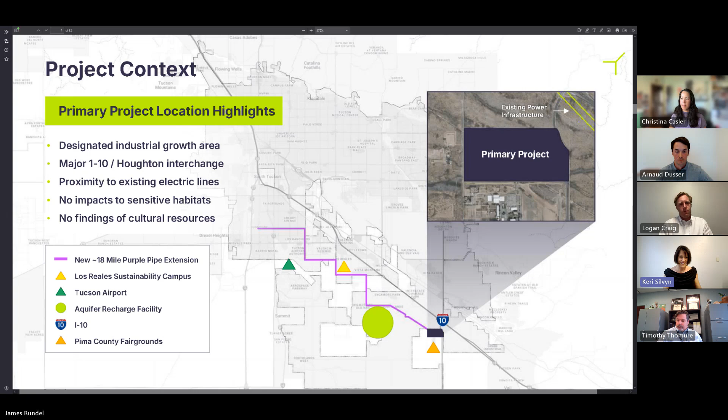We can go to the next slide. And I'm going to speak very quickly about the commitment that Beal is making to water.

I think Tucson Water is going to talk a little bit more about this. Project Blue will be net water positive. We're setting a new standard for industrial users coming into our region to support the city's longstanding water conservation and water stewardship. We will replenish over 100% of consumptive use, both while we are using potable water for the 2 years that we will be building the reclaimed water line for the first phase, as well as once we're using the reclaimed water. We're going to be investing in programs that truly create and tap into new water. Again, Tucson Water will explain that in a little more detail.

Just want to note, the reclaimed water line will take 2 years to construct. The consumptive loss replenishment requirement in the development agreement is for both potable and the ongoing reclaimed water use. The infrastructure investment, which is the second pillar under the water positivity, is that 18-mile reclaimed water line and the 30-acre aquifer recharge area being designed, constructed, and oversized by Beal Infrastructure, providing that opportunity at no cost to the city and the taxpayers. This brings that reclaimed water opportunity into this southeastern area of the region.

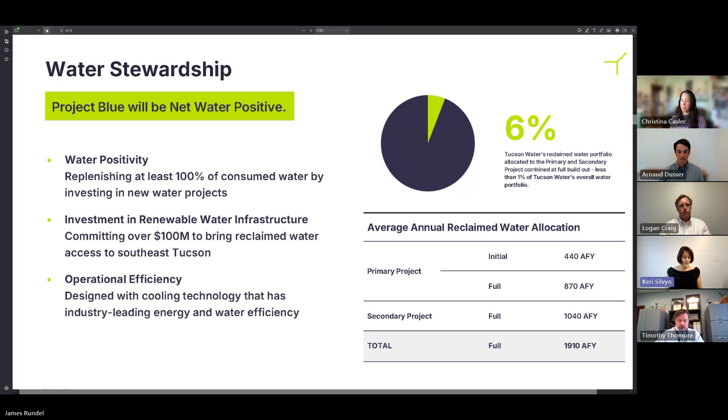Go ahead, next slide. This next slide provides a little bit of context.

Actually, we don't have that slide, so I'll just move on to power and clean energy.

Project Blue is committed to prioritizing clean energy generation sources. Project Blue will be a customer of TEP, subject to the energy mix that TEP has and will be creating in the future, aligned with goals towards renewable energy generation. Project Blue will support and not impact TEP's net zero emissions by 2050 goal, and it will also not impact TEP's retirement of all coal assets by 2032.

In the initial phase, which is a little less than half of the initial project, the power required for that phase is excess capacity in the current energy mix plus 900 megawatts of renewable resources identified in TEP's most recent all-resource RFPs, which are 100% renewable. The initial phase also includes Project Blue funded infrastructure improvements that will be oversized for the system.

Project Blue is working with TEP, the system, and the city on the feasibility of installing solar panels over the parking areas. We can't put those on the roofs because of the equipment needed there. For future phases, Project Blue supports TEP's 2050 net zero emissions plan going forward, and the generation for future phases will be sourced through new RFPs as required by state law.

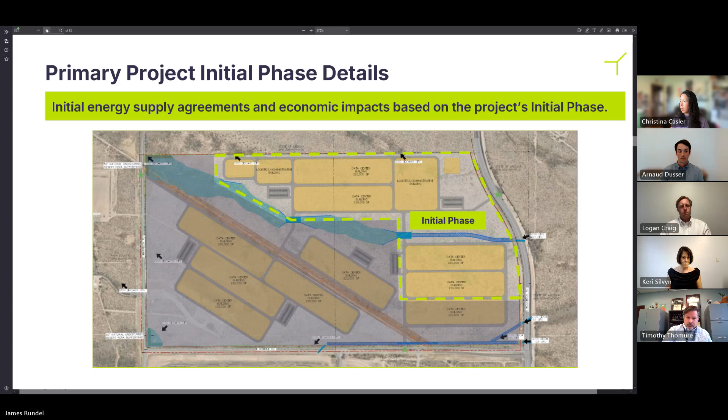The tax revenue generated into the entire public system for that initial phase - city, county, and state - is $250 million over 10 years. $97 million is what's coming to the city of Tucson's general fund, which supports anything the city of Tucson uses its general fund for. This project will also support school districts.

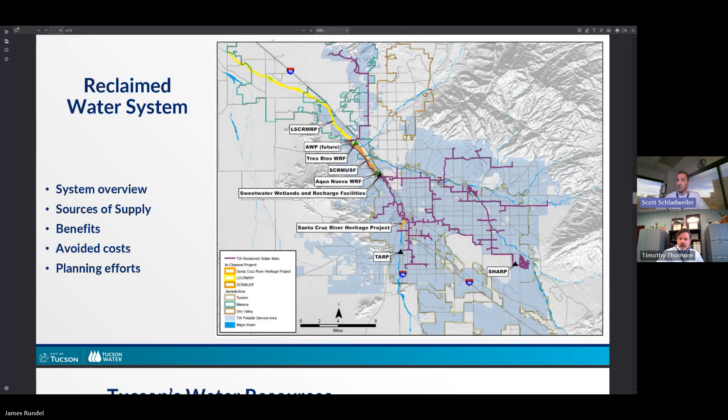All right, let's take a snapshot and look at our total resource portfolio. First off, let's start with Colorado River water. We have the largest allocation in the state of municipal and industrial Colorado River water, over 144,191 acre feet a year. Our average demand is right around 100,000 acre feet a year.

So for decades since we've been taking this, what we don't use we've been putting in the ground and storing, and we call that banking. We've been putting that water in the ground where we can use it for future use. Right now we have almost 6 years of just Colorado River water stored in the ground.

We're doing the same thing with reclaimed water. What we don't use and what isn't delivered to customers to meet demand goes into the ground where we're storing that water. We get long-term storage credits for that, and that helps build our resource portfolio up.

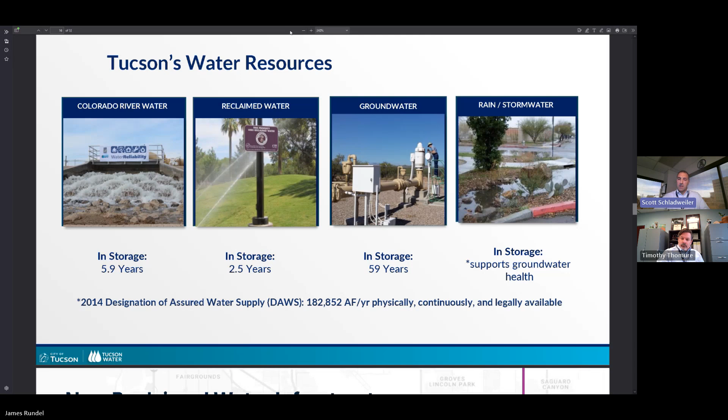I know there's a lot of concern with groundwater. Groundwater is a finite resource, but there's a lot of groundwater available in Tucson. We actually have millions and millions of acre feet in the ground that are physically and legally available for us to access, to continue supplying our customers and meeting demand. There are right around 60 years of water in the aquifer right now as we speak.

One of the other sources of water we're really starting to focus on, and have done quite a bit with over the last couple of years, is rainwater in the form of rainwater harvesting, but also stormwater, capturing that water to offset groundwater use and support other environmental projects such as our Storm to Shade program and our Million Trees program, where we can install other vegetation around town that'll help with the heat island effect. These are really hard to quantify in some ways, but they do offset groundwater use and have a very positive effect on our environment around town, as well as the quality of life.

One of the questions we always get, and it came up even at the last meeting, is how much water do we actually have? As a municipal provider, we are required to have what's called a designation of assured water supply. This is required by the Department of Water Resources, which was established as part of that 1980 Groundwater Management Act I mentioned. This is a very important document - it protects both customers and the environment.

It's actually a very lengthy process. What we have to do is provide all of our resources, all of our current demands. We have to show our committed demands, which is all of our platted lots - those lots we've committed to serving but have not yet installed meters on or have not been built on. We also include projected water use and projected growth throughout our system. We have to show that we can provide water to all of our customers and projected customers for a period of 100 years.

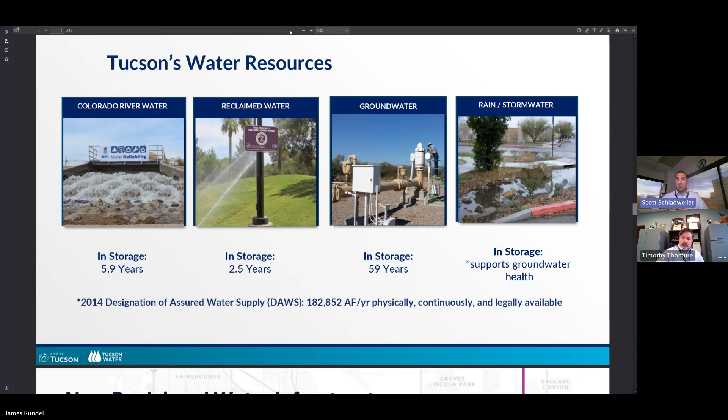I can't tell you what the final numbers will be on the new one, but those will be out and public very soon, even made public for review. That number is not going down; it's actually going up quite a bit. So our capacity to provide for the community is steadily increasing, thanks to the community. We have a very water smart community, conscious of where we live and how important water is. But there were also very important decisions made by mayors and council, past and present, that set the stage for our water sustainability and future.

As mentioned, water demands on the reclaim system during winter months are very low, so during those months we'll be pushing water to the recharge facilities. We need places to store this, and this facility will add capacity for the Tucson system to store additional water. During peak months, we'll recover water from this facility to meet demands for Project Blue and any other future customers in that area. One major advantage is that with storage here, recovery during peak months will have much smaller impact on the rest of the system, all the way back to our reclaim plant.

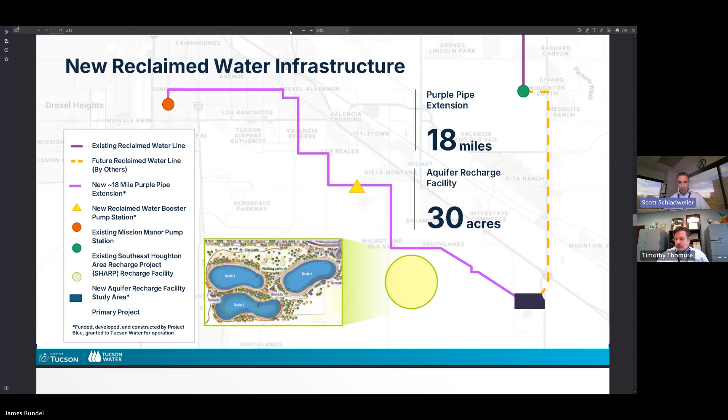Next slide. Let's switch gears and talk about water positivity. I know there are a lot of questions about what this means. Project Blue will be required to replenish at least 100% of their consumptive use—this is all potable and reclaimed water supplied to the primary or secondary site. What that means is we need to replace that water with something measurable and quantifiable that shows an increase in water quantity, water quality, or access to water that wasn't available before.

This is going to be done in a couple of different ways. Starting on day one, as soon as meters are set, Project Blue will pay all the same standard fees and rates that every other user will pay. Whether that's for potable, they'll pay their commercial rates. When they're on reclaim, they'll pay the reclaim rates. They'll pay the same monthly fees as any other customer.

But in addition, they will pay what's called a water positivity or water replenishment rate. This is a rate paid to Tucson Water so we can implement water positivity projects that will offset the use of this water.

There's another method they can use as well, and that is they can implement a project on their own to offset that use. We'll talk about some of those projects in a couple seconds. That might mean constructing facilities, or it might mean implementing programs that help with conservation.

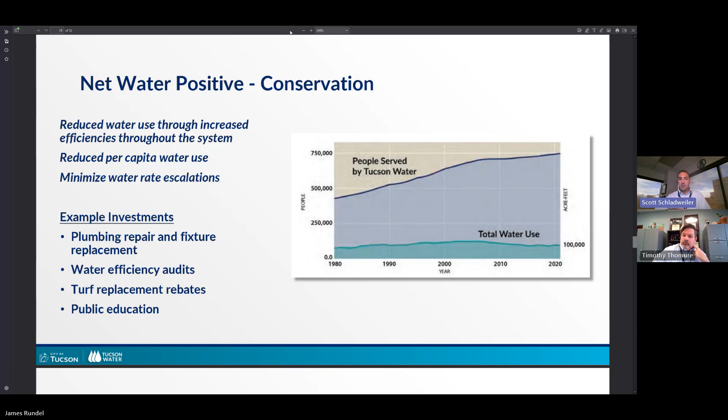System efficiency. Every water system in the world leaks at some point, right? We have leaks throughout our system. There are water losses that we need to address that impact our ability to provide water. For example, we pump a certain amount of water, and what we end up billing is always quite a bit less, maybe 8 to 10%.

Some of that water, we know where it goes—we test hydrants and flush for water quality reasons. But there are always other ways we can capture some of that lost water, for example through leak detection efforts. Advanced metering infrastructure is something we're about to start implementing. This is an opportunity that has shown real savings throughout the country and other places. We're going to be starting it in our program within the next year or so, within the next several months, deploying advanced metering infrastructure meters.

This program has, in other locations, shown savings within the range of 6 to 12%, and that's with full participation. We might see something a little less than that, but when we compare that to our demand, that is actually a real savings. So even if we did 3%, that's up to 3,000 acre feet a year when we look at our total demand.

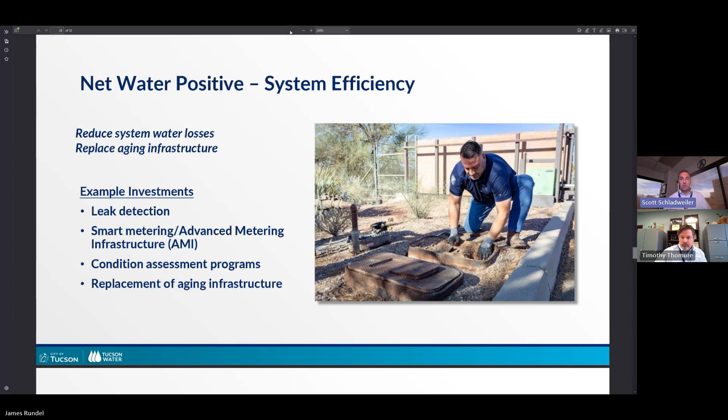Supply augmentation: this is the acquisition of additional water supplies. We can look at importation of water from other locations, that could be desalinated water from another source, even outside of Tucson. There are folks with Central Arizona Project leases elsewhere in the state that may not be utilizing their full lease, may not have a need for it, and may be willing to sell it, or some who don't physically have access to the Colorado River water, and that water could be delivered to Tucson. There's also the opportunity to purchase long-term storage credits.

There was a press release yesterday that showed Tucson Water just purchased 21,000 acre feet of long-term storage credits right here in Tucson. The Bureau has long been storing their portion of effluent in the Santa Cruz River, and just recently they auctioned off about 30,000 acre feet of water, and Tucson bid on that. We were very successful, and we're actually in the process of transferring 21,000 acre feet to our water portfolio right now.

This is something that could be transferred and utilized for economic development. So there are a number of opportunities with supply augmentation. Next slide.

Supply restoration is another big one. Tucson has been heavily impacted by PFAS. We've lost over 30 wells, turned them off as a result of PFAS contamination, not by our doing, but by others. We've been very protective of our water quality, and this has resulted in almost 28 million gallons a day of capacity and redundancy that we've lost within our system.

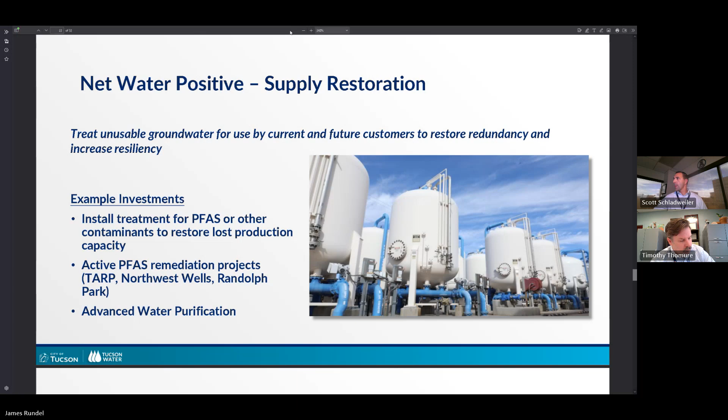And then finally, we have nature-based solutions. Things like our Storm to Shade program, a green stormwater infrastructure program that we charge fees for. This has been a fantastic program, we've received accolades nationwide. What this does is we use stormwater to offset the use of groundwater to plant vegetation around Tucson through curb inlets and chicanes. It's been an amazing program.

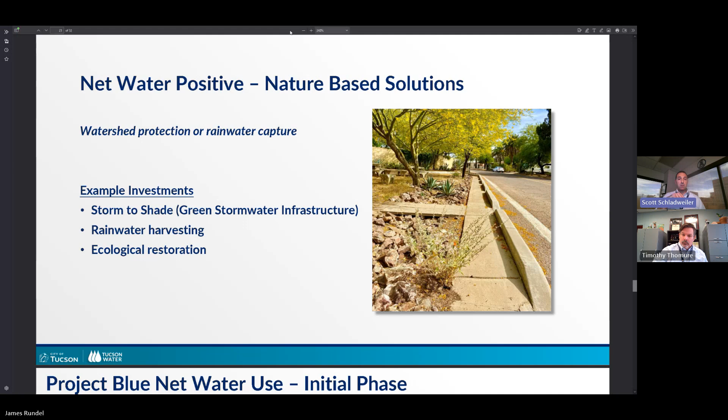Rainwater harvesting also has offsets and the ability to collect water and offset the use of water around town. Ecological restoration is another big one — there's tons of opportunities within the river, around town, collaborating with other agencies to use stormwater, to put water back in the ground and make that water available for us to use. So nature-based solutions is a big one. Next slide.

And then finally, this is a comparison of how Project Blue might compare to golf courses or an equivalent number of houses when we look at overall water positivity. If we take the initial use of water out of Project Blue, which is about 440 acre feet a year, at the water positivity rate of $750 an acre foot, they would be contributing over $330,000 a year. That money would go towards any number of projects we were just talking about to help offset their water use. So at the end of the day, the net water used by Project Blue would be zero, because those water positivity projects would contribute back to our resource portfolio.

When compared to a golf course, for example, the average golf course uses somewhere between 400 and 500 acre feet a year. There is no investment, that water is delivered to the golf course just strictly for irrigation, there's no conservation efforts out there, so there's nothing conserved. When compared to single family homes, 1 acre foot of water typically serves somewhere between 3 and 4 single family homes per year. So if we used four single family homes here, that's about 1,760 homes.

Through conservation fees and our GSI fees, we collect about $57,500 a year. At the rate of about $750 an acre foot, that means we'd be able to offset about 77 acre feet per year. So what that means is the net water use for 1,760 homes would be reduced to about 363 acre feet a year.

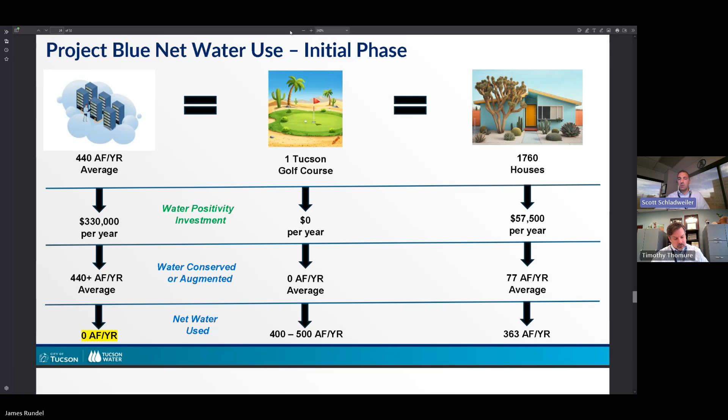So that's just a general comparison of how all of these equate. But what we want to focus on and reiterate is that everything that Project Blue does will be water positive.

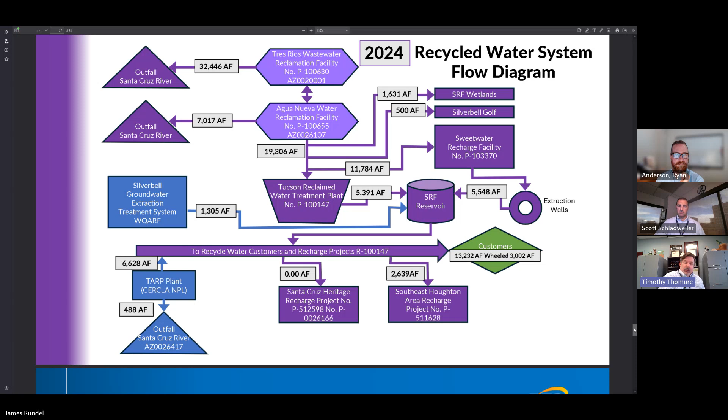Next slide, please. All right, we still got one big segment of presentation with questions around it. So this is energy. And as I turn it to you, Ryan, I'm going to also seed a question to you that came in through the chat tonight.

So a question that's coming up a lot is, we've talked a lot about the water supply in Tucson and the reclaim system. And the question that comes up repeatedly is, but what about the water needs outside of Tucson for the increased energy demand? It's a very fair question, comes up all the time, and I just want to seed that to you as you go into your presentation.

Okay, thank you. Can you hear me all right, Tim? You're good. Okay, good. I just wanted to introduce myself briefly. I'm Ryan Anderson. I manage our business development department here at TEP. Worked at TEP for about 8 years.

And the reason I'm speaking tonight is because my department supports our existing customers, largely our commercial and industrial ones, your school districts, hospitals, the city, the county, the airport, our military installations, the mines. And we also support economic development, which up until about a year and a half ago was pretty sleepy. But my department supports that engagement and runs these prospective customers through the process. So that's why I'm speaking tonight.

We're here to support a data-driven discussion and transparency. I want to talk about the diligence a utility does as we carry out our mission to steward the grid for all customers. And I do have to ask for a little compassion. I get nervous talking to big groups of people, but please do fact check me if I get anything wrong unintentionally.

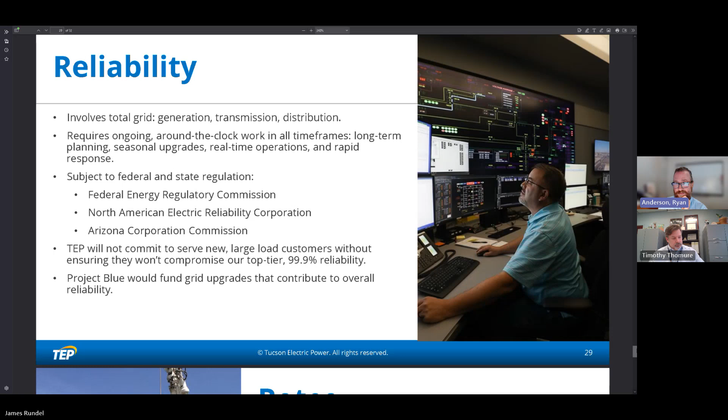Rates. So I touched on this at our last public meeting. Utility rate making can be seen as a complicated process, but I want to try and summarize it as best we can here.

When you look at a large commercial industrial customer that has high steady energy use, think of it like driving on the highway versus driving in the city. When you're on the highway, your car is just kind of at a steady 60 miles an hour, maybe set it into cruise control. In many ways, that's the most efficient use of your vehicle - you don't have the wear and tear of the stop start. When you're driving in the city, you're accelerating, you're braking. Many customers, like me as a residential customer, my use goes up, then down, then up, then down.

A data center, their use is just steady. Well, it's steady, it's just pretty high use. That's actually an efficient use of the grid. That helps us recover costs from all of our infrastructure that we have to build out in the system to serve all customers. So in the utility rate making world, a large user with a really high 'load factor,' i.e. steady use, is a good thing for the system.

And the way that we design our tariffs - and again, you can look up a lot of information about tariff design, utility rate design - the way we design our tariffs is to make sure we cover the costs associated with serving that class of customers. For big customers like what Project Blue would be, we will cover their costs and then some. Project Blue service would be provided through what's called our LPS TOU HV - our large power service time of use high voltage rate. That's a tariff we have available for big customers.

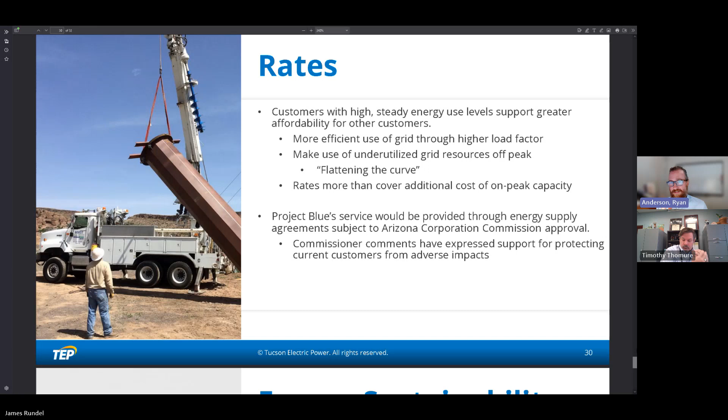So, energy sustainability. This is the question I've been getting a lot from folks who aren't focused on the jobs piece or the tax revenue to support city spending programs, but really focused on some big picture things. And it's a lot.

There's a lot associated with data center development, for better or for worse. I first started seeing headlines around data center development, its potential and real impacts, in the winter of last year. If you go back and start Googling, I remember a Washington Post headline about America's energy capacity, New York Times pieces about climate goals and data center development's impact on those, and Wall Street Journal talking about investments being made. So it's catalytic, and the fact that people are paying attention is really appropriate.

So that's a big question, and I've seen folks getting together in the community and talking that through, which I think is great. I'm going to try to stay focused on this project. Project Blue, as they've stated a number of times, is interested in TEP's service area because we have high solar production, both utility-owned and a lot of distributed generation, and we have potential to do more.